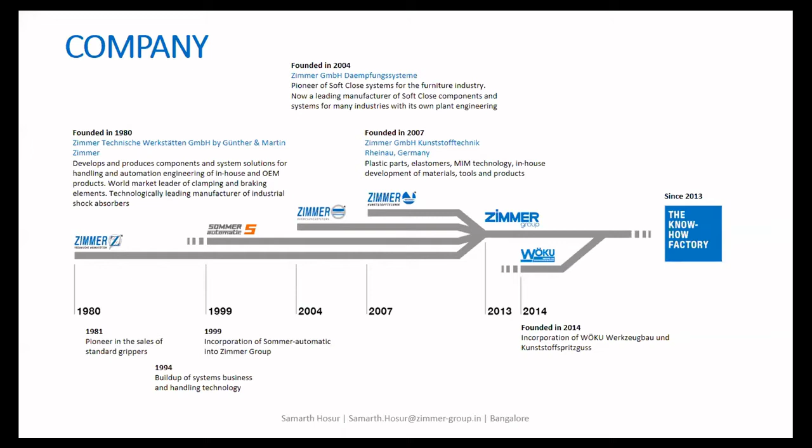Yeah, this particular chart tells us how the development of Zimmer Group has taken place from 1980 till now. You can see at the bottom, so in 1980 we developed the first standardized gripper, and in 1986 we developed tool changers. We have built shock absorbers for end cushioning. And today we have one of the most sophisticated end of the arm tooling that is portable, suitable to Industry 4.0 or the next generation factory, as we can call it.

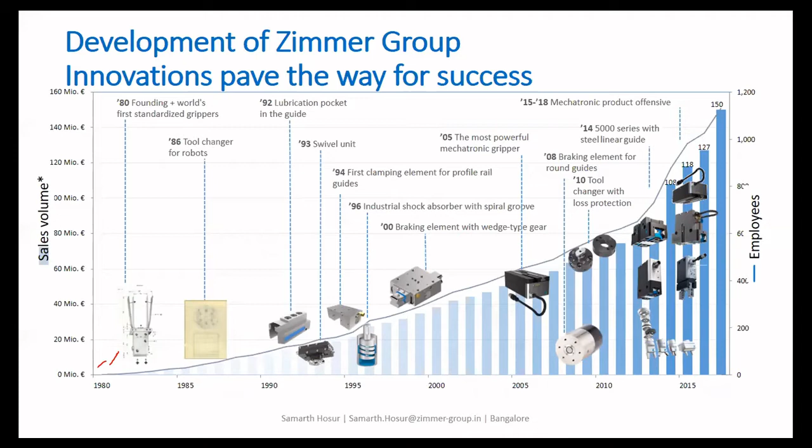So what I would like to tell you is, in this modern age of the digital factory, a lot of robotic systems are deployed in day-to-day production in a variety of industries, may it be automobile, pharmaceutical, or food and beverage industries. There are a lot of robots being deployed for the production of a variety of products. So now we can say robots have become a commodity, and the most important part of this robot would be the end of the arm tooling solution.

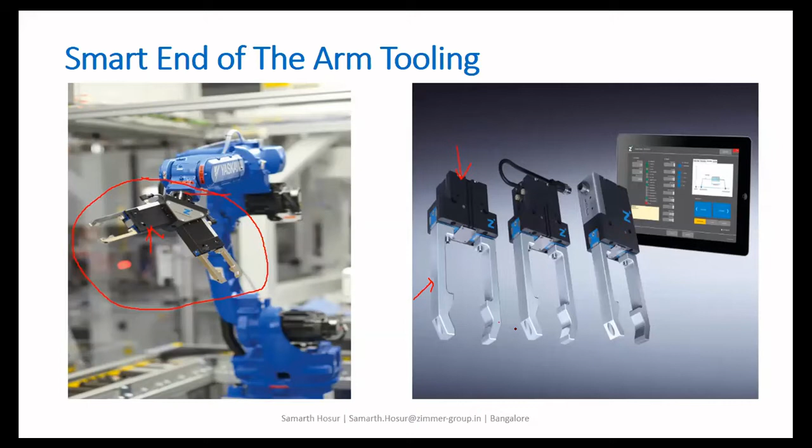Let's say we talk about a machine tending application wherein we are handling a cylinder block. These grippers will come in contact with the component, pick the component, and then place it inside the machine for operation. So these are generically called grippers, because they help in gripping the components. You can see there are 2 jaws. This is your gripper and these are the jaws of the gripper. This is just a schematic representation of how exactly the gripper looks. It looks similar to your hands. You can imagine your hands as 2 fingers of a gripper, and then analyze how we can use these grippers in industries for gripping applications.

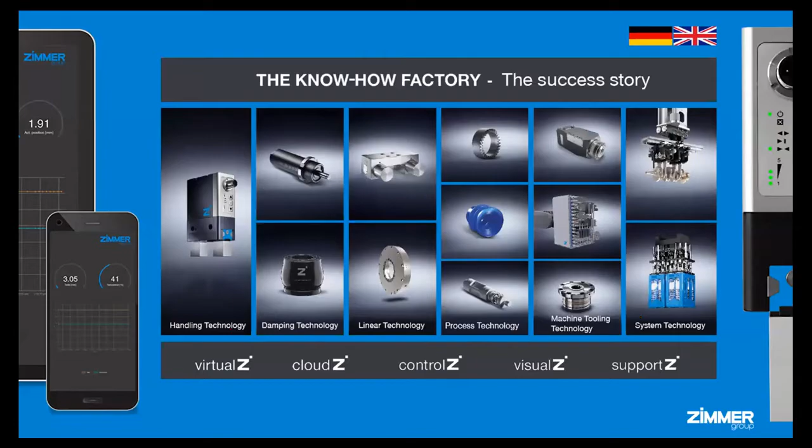Moving ahead, these are some of the technologies Zimmer Group operates in: handling technology, damping, linear systems, and all these technologies. We develop components for these 5 to 6 different technologies at the moment. So today, specifically, we are going to talk about handling technology. When we say handling technology, it will be the grippers. When we say grippers, it will be the end of the arm tooling. End of the arm tooling is nothing but the grippers fitted to the end of the robot arm. So we will talk in more detail about the types of grippers we have, how they can be used and for what kind of applications.

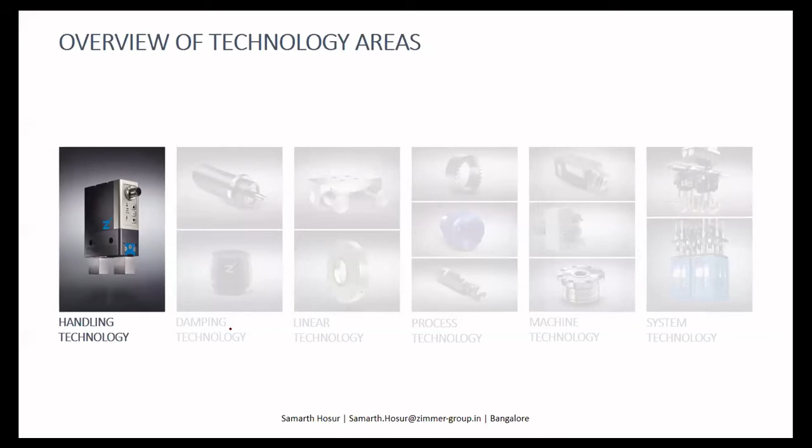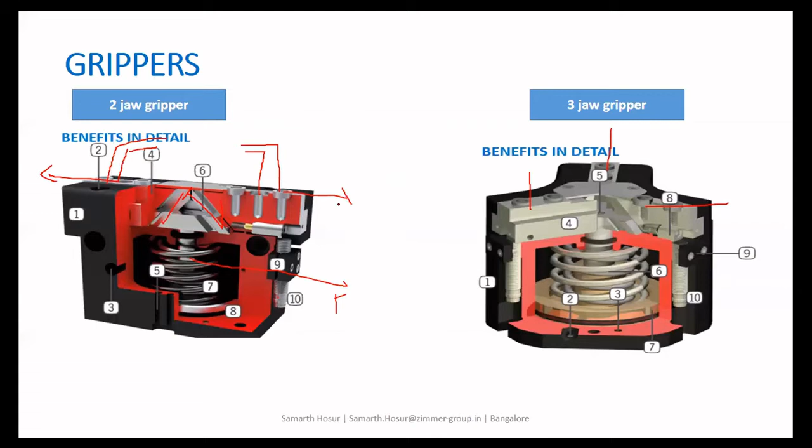Now let us talk about one particular series of gripper. We have this gripper series 5000. In this particular series, we have 3 different types of grippers. Again, one is 2-jaw parallel grippers. Why we call parallel? Because the gripper fingers will open in parallel fashion. 2 grippers will open in parallel fashion, one in this way and one more in this way. So we call it parallel moving jaws or parallel operating gripper.

Then we have 3-jaw grippers, wherein the opening of the gripper will be in concentric fashion. And we have 2-jaw angular grippers, where the opening of the jaws will be in an angular fashion. Angular in the sense the opening will be in terms of degrees. So what is the mode of operating these grippers? One is pneumatically operated, one more is hybrid operated, and one more is electrically operated.

When we say pneumatically operated, we have 6-bar pressure to operate these grippers. On supplying 6-bar pressure, this gripper will open and close and help in gripping the components. In hybrid, the actuation of the gripper is again with pneumatic air, but you will have an electrical feedback. That is the reason it is called hybrid, because actuation is pneumatic and you have an electrical feedback.

And one more is the completely electrical version, the most sophisticated grippers or the Industry 4.0 grippers. These grippers are operated by a BLDC motor as well as the servo motor. A 24-volt supply is required to actuate the electrical grippers. This actuation in terms of pneumatic, hybrid and electric remains the same for the 3-jaw gripper as well. The only difference is we have 3 jaws here instead of 2 jaws.

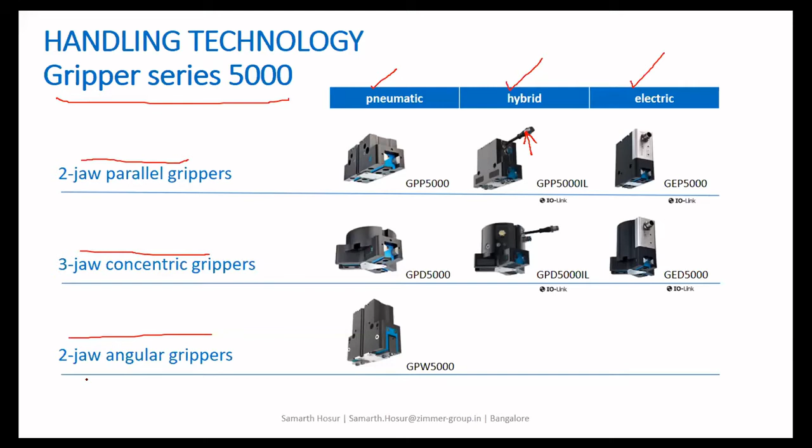So I hope the different types of gripper and the different actuation of the gripper is pretty much clear. We have 2-jaw gripper, 3-jaw gripper, as well as 2-jaw angular gripper. The actuation is 3 types: pneumatic, hybrid, and electric. Electric is again 24-volt supply. So I hope until now the gripper part is pretty much clear. We'll move ahead and study a little more in detail about this particular type of gripper.

Now we are exclusively talking about the gripper family 5000. This is one of the sophisticated or premium class of grippers, we can say. Why? Because it has a lot of advantages compared to anybody in the market. We have the corrosion protected gripper. The body of the gripper is stainless steel, steel on steel. This is the guidance. As you are all from the electrical as well as the mechanical departments, you understand much better about the friction.

So when you have a steel on steel, the friction is less. When the friction is less, the gripping force is more. So that is why in this particular wedge mechanism, where you can see this particular part is steel, wherein your fingers come and mount on this particular part, the friction between the gripper finger and the gripper is reduced to a larger extent. This is one of the key advantageous features of this particular gripper family.

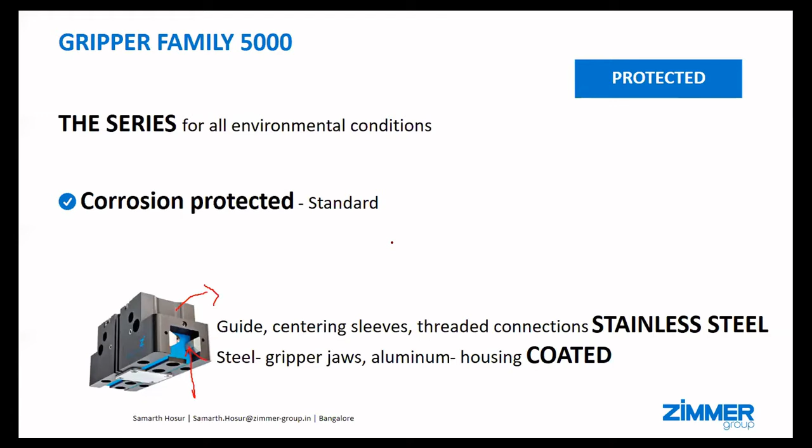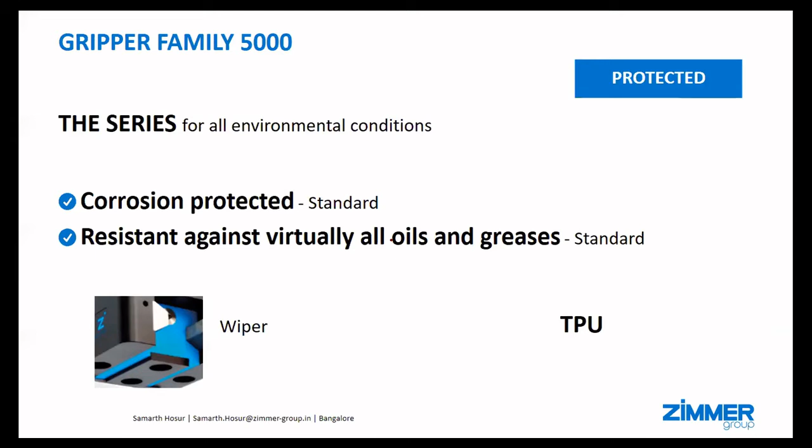Again, we have built this gripper to work in varied atmospheres. This particular gripper is resistant to various types of greases, various types of oils, or any kind of lubricant which is present in the industries. This is IP64, ingress protection class 64. 64 is specifically used for dust and dirty environments, or when you're operating the gripper inside water, or any liquid, grease or lubricant is there. This particular gripper is suitable to operate in such drastic conditions.

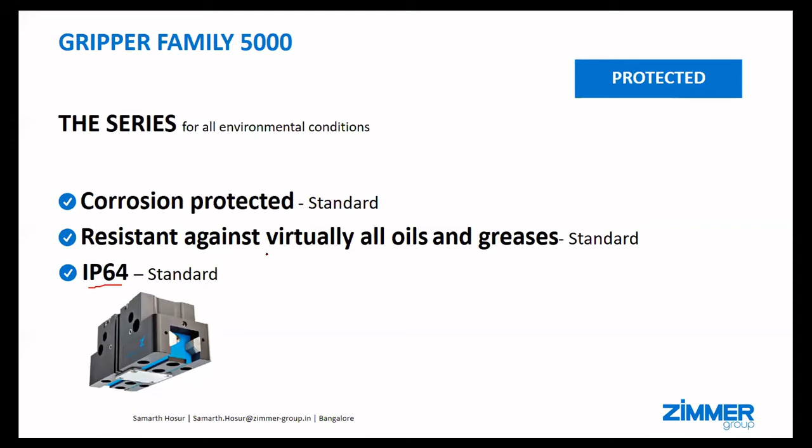See, one more advantageous feature of this is, as I said, the body of the gripper is completely steel and the guidance is steel on steel. The wear and tear is reduced to a larger extent. You can use this gripper up to 30 million cycles. When I say 30 million cycles, it is 30 million times opening and closing of the gripper. Opening and closing is considered as one cycle. So 30 million cycles this particular gripper can be used.

And this is the highest life cycle of the gripper which is available in the current industry, or in the current market, what I can say. Nobody has this particular life of the gripper. This is 3 times better than anybody in the market.

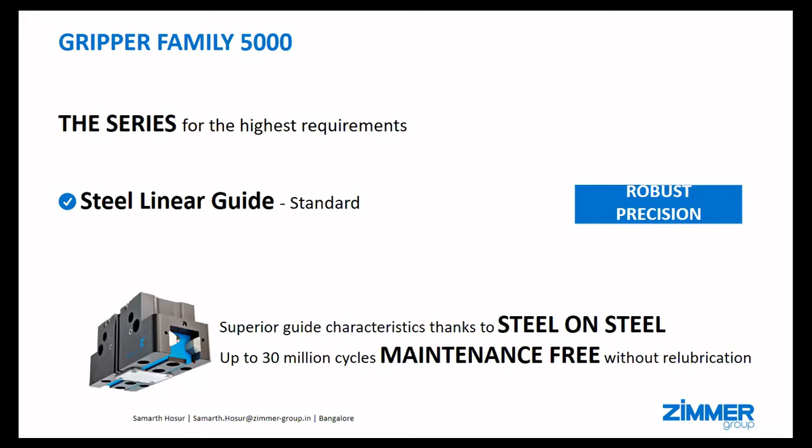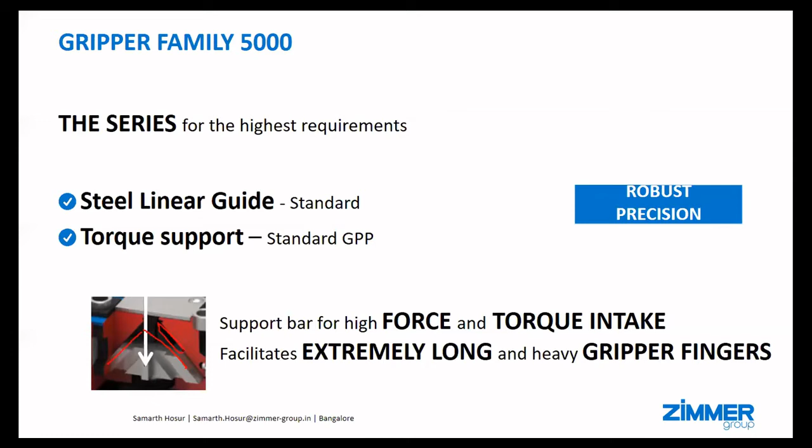Moving ahead, as I was talking, the important feature is this particular wedge mechanism. This is a wedge mechanism. As you can see, whenever you pass the pneumatic air, this moves up to push the piston. So the angle here is reduced to a larger extent. This particular angle is reduced so that the contact is increased. So the movement is very fast, and the finger can be used to a larger extent.

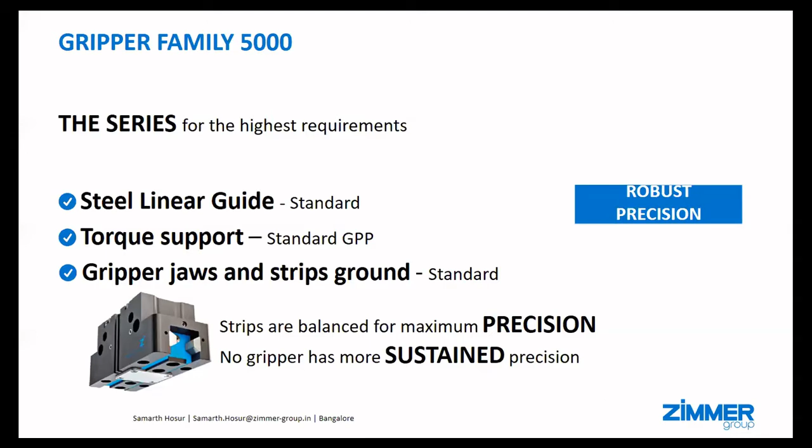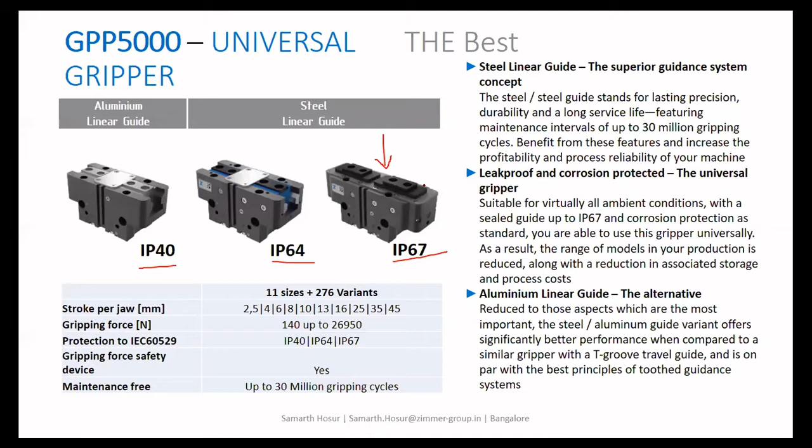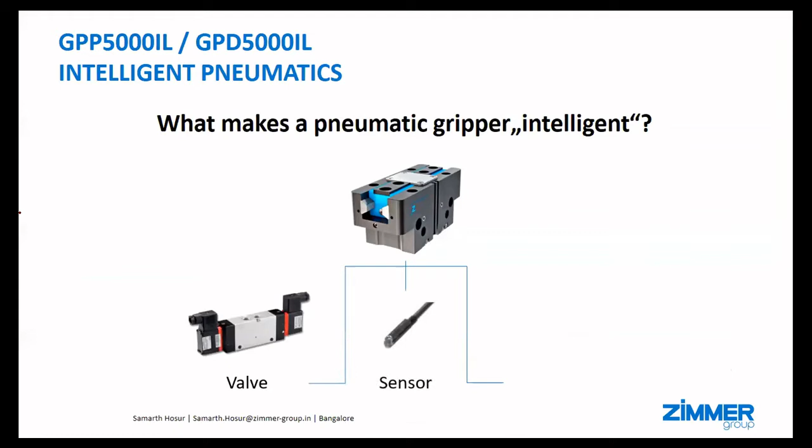Moving ahead, we have the intelligent grippers or the hybrid grippers in the 5000 family. Why do we call this particular pneumatic gripper an intelligent pneumatic gripper or hybrid gripper? Because for a pneumatic gripper, you would require a pneumatic valve or a flow control valve and a sensor to understand whether the gripper is open or closed. All these accessories you would require for a pneumatic gripper.

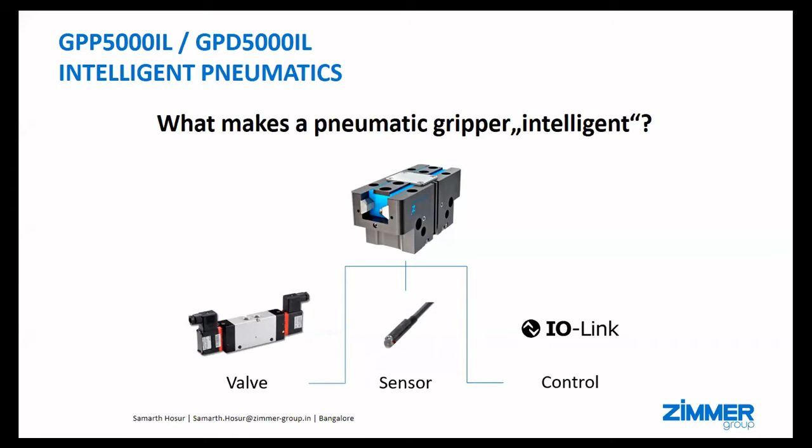Whereas for a pneumatically intelligent gripper or hybrid gripper, both will be inbuilt inside the gripper. The sensor will be inbuilt, as well as the flow control valve or pneumatic valve. Yeah, this is how the intelligent grippers or hybrid grippers look. This will help you reduce the cycle time, and it increases the production time by, let's say, 30%.

Again, it is a pneumatically driven gripper, but you have IO-link technology in it. IO-link technology will help you understand whether the gripper is closed or open, or in other words, it helps you sense whether the component is being gripped or not. This feature is inbuilt inside this gripper. And one more important feature is you can adjust the gripping force. A gripper should have a certain gripping force to hold a particular component.

Let us imagine you want to hold your phone with 2 fingers. You would require a certain force to hold your phone. Similarly, grippers also require a certain amount of gripping force based on the weight of the component. When holding your phone with 2 fingers you need one gripping force, and the weight of your phone varies. Now let's say you're holding a 10 kg stone with your 2 fingers. The amount of force you would require is a little higher. Similarly, we have varied ranges of grippers for different weights of component.

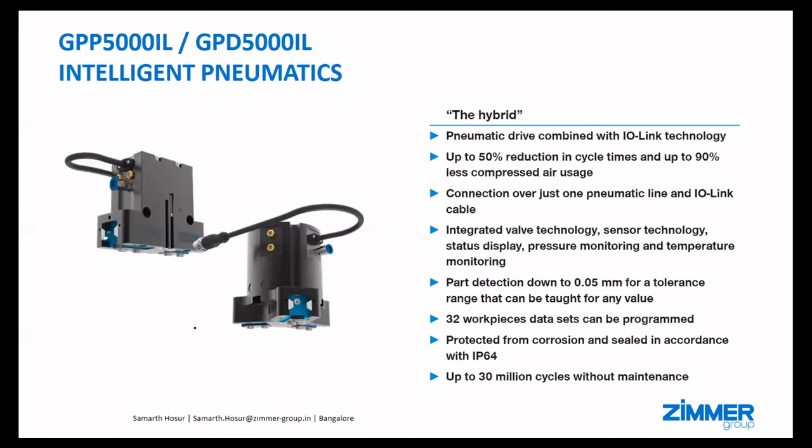This particular slide shows how the connection of the IO-link is available and how you will need to supply the pneumatic air. This is the port wherein you need to supply the pneumatic air, and this is the cable which is coming out, which can be taken as a feedback.

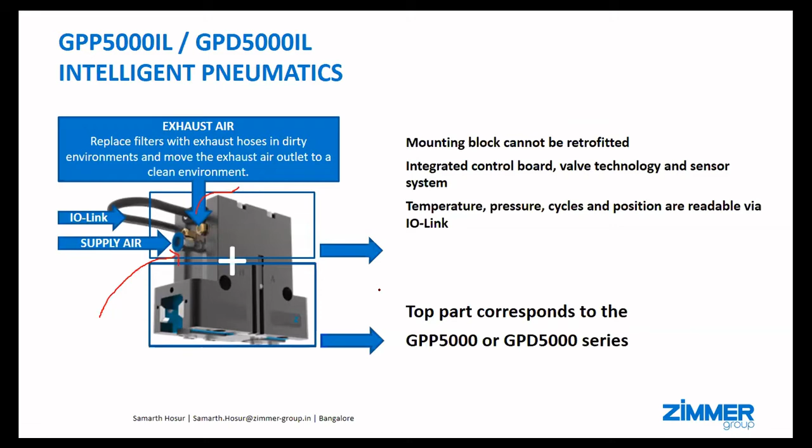This particular feature which I explained earlier remains the same here as well. This pneumatically intelligent gripper is also called a hybrid gripper. I request everyone not to get confused between the hybrid gripper and the intelligent pneumatic gripper - both are one and the same.

Gripping force safety - yes, there is a gripping force. Let's say suppose there is a sudden power cut, then the gripper should not drop the component, because it will damage the entire system. So there is a spring mechanism inside the gripper which will hold the force and help you in retaining the component.

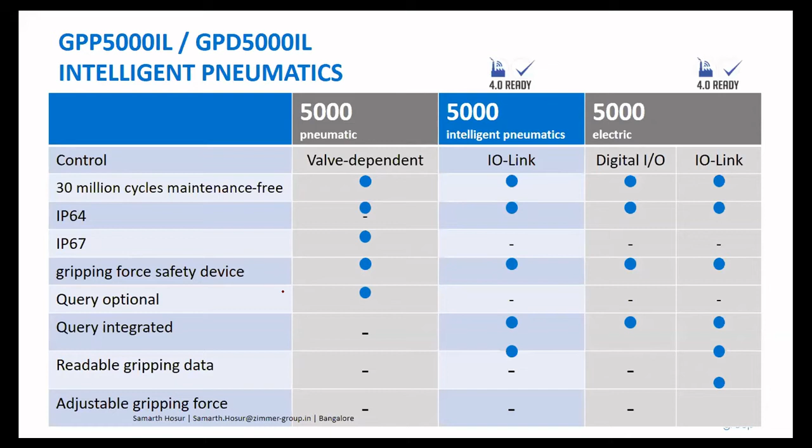So that is the movement of your fingers or the jaws - 10 mm per finger is the movement of your jaws.

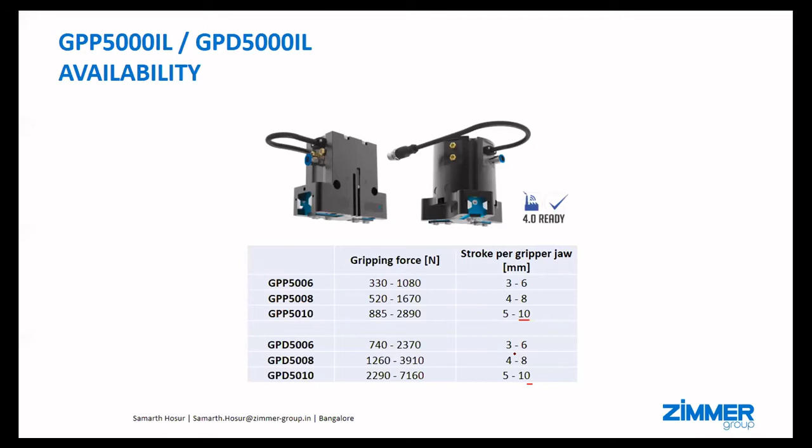Again, the IO-Link masters can be from Beckhoff, can be from Siemens, can be from Mitsubishi - any make of IO-Link master you can use, and it is compatible with all the makes of the IO-Link masters.

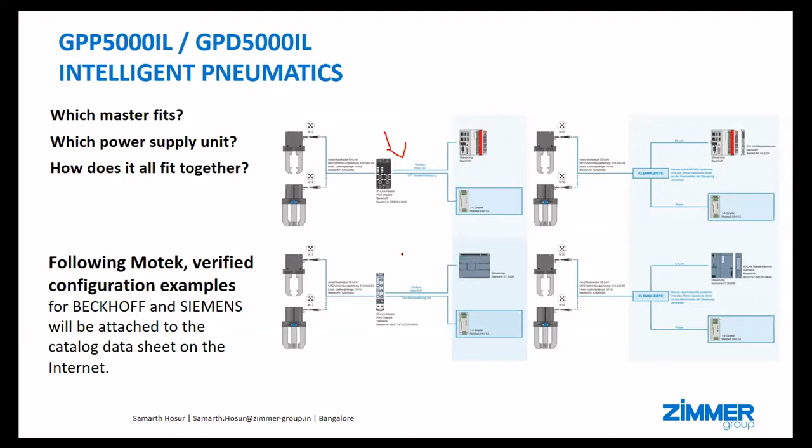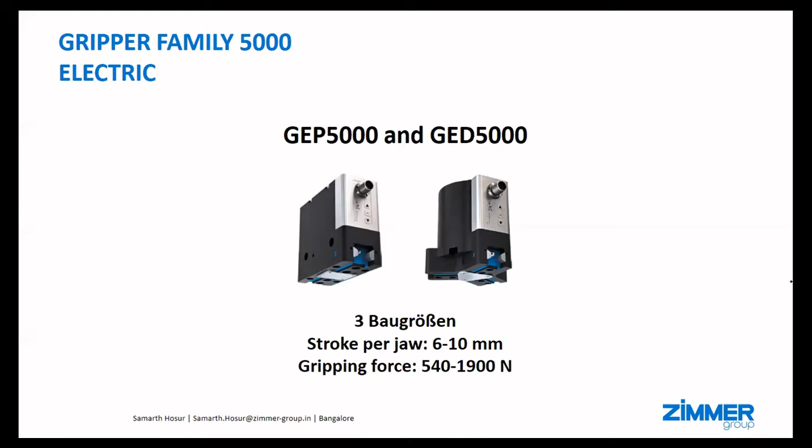Now moving ahead, we talk about the exclusive electrical grippers. The supply required to actuate this particular gripper is 24 volts electrical supply. And why we call this particular gripper the sophisticated gripper or the industry 4.0 gripper? You can see here the advantage of electrical gripper over a pneumatic gripper.

For a pneumatic gripper, what are the things you would require? One is a gripper, and you would require a sensor, you would require the pneumatic valve, you would require a pneumatic service unit, and you would require a signal splitter to connect it to your controller. These are the things which you would require with respect to a pneumatic gripper.

Whereas in electrical gripper, it is directly connected to your controller. All these features - the sensor, the pneumatic valves - are inbuilt inside this particular gripper. And the connection of the electrical gripper to your PLC is through a single cable, and this cable is used for data transmission as well as for the transmission of the signal. Both ways, the single cable is used to transmit the signals.

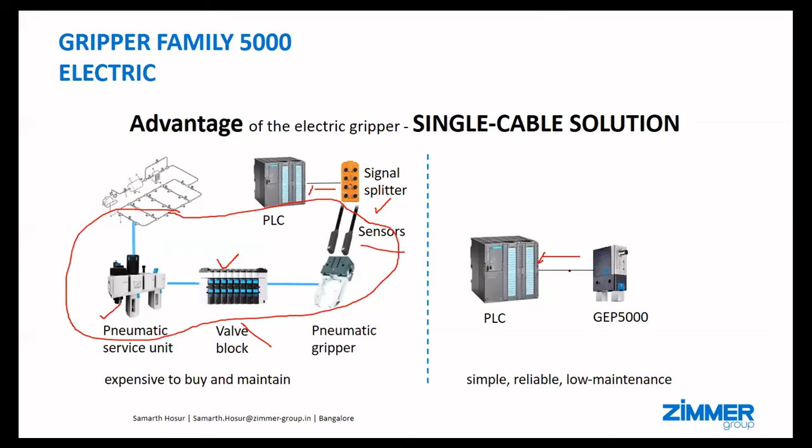You might have the question why we need to connect the gripper to the controller. The controller is the thing which controls the operation of the entire system, not only the gripper - the entire system, the robot, the entire cell is being controlled by the controller. So each and every component is connected to the controller. Similarly, the gripper is also connected to the logical controller.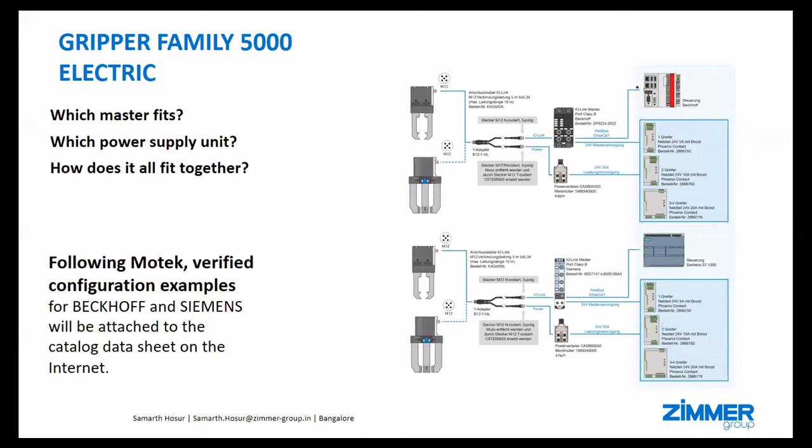So now I'll just summarize about the gripper family 5000. We have studied about the pneumatic grippers, wherein the actuation is with the help of 6-bar pressure. Hybrid grippers, or the pneumatically intelligent grippers, wherein the actuation is with the help of pneumatic air and you will have electrical feedback. And the electrical grippers, the complete electrical grippers, the industry 4.0 grippers, wherein the actuation of the gripper is with the help of 24 volts, and you will have inbuilt sensors and all the components built into one particular gripper.

So moving ahead with the angular grippers, what are the advantages and features of angular grippers over the parallel grippers? The reason I'm making this comparison is it will make the understanding of the parallel gripper as well as the angular gripper pretty much clear. So I'll demonstrate the angular grippers in comparison with the parallel grippers.

In parallel grippers, the opening of the gripper is in a parallel fashion. Now in an angular gripper, as I said, the opening of the gripper is in an angular fashion: 0 degree, 15 degree, 90 degree. That will be the opening fashion of these angular grippers. This angular gripper has 30 million maintenance-free cycles, and you would not require any maintenance until 30 million cycles. It's very robust, built for very harsh and dirty environments. All these features are also involved in this particular series.

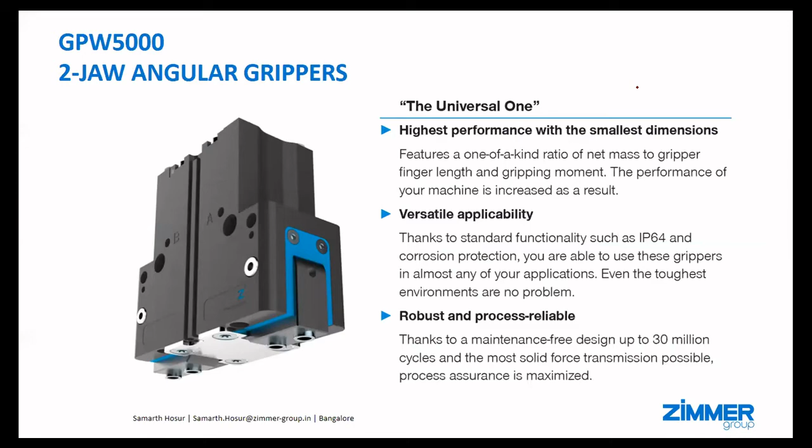Yeah, see, you have seen the parallel gripper. These are the jaws which are opening up in an angular fashion. You can see the wedge is made in an angular fashion. This makes the opening of the gripper in an angular fashion.

On supplying air, this particular cylinder will push this piston, and then the piston further moves this wedge and the gripper opens in an angular fashion. So just have a look at this particular point—this is a positively driven lever mechanism, which will help you in opening of the jaws. These are the gripper jaws where you can mount your gripper fingers. And this is the double acting pneumatic cylinder we have, which will help you in moving the piston up and down so that the gripper opens and closes.

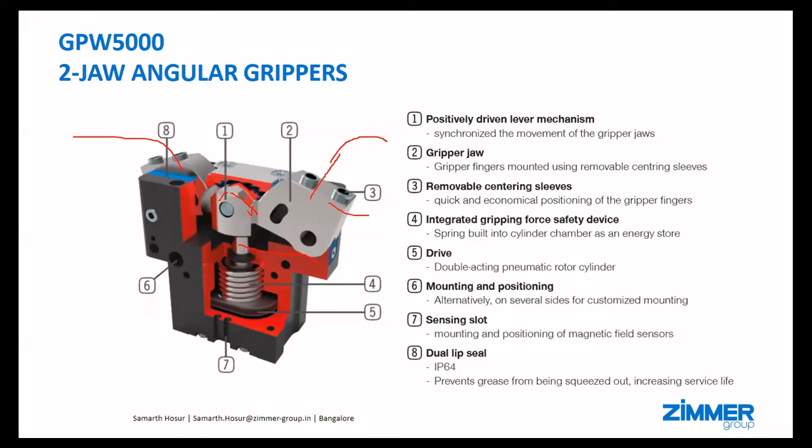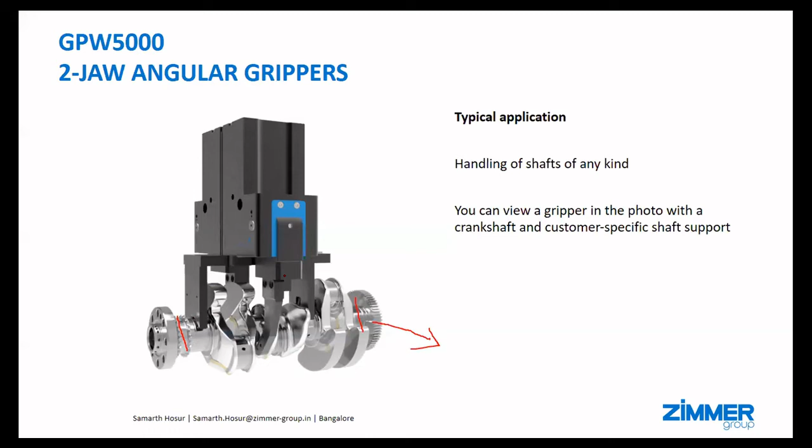The advantage of this particular gripper when handling the crankshaft is this—we call it a journal. This is your journal. The dia of the journal usually varies; we have a lot of variants in the industry. This particular journal dia varies from a large variant—let's say from 30 mm to 250 mm. So there's a larger difference in this dia. To handle such large variants, you can use this angular gripper, because it can accommodate many variants in its opening and closing.

I'll tell you a little more in detail about this. So now, as I said, we'll have a comparison with the parallel gripper. Let's say this is one gripper—this is a parallel gripper, and this is your angular gripper. Now I'm handling this particular component. My stroke per jaw is 13 mm—this jaw moves 13 mm in this direction and 13 mm in this direction.

This is the parallel gripper. How about the angular gripper? The opening will be in an angular fashion, right—15 degrees. The opening of this jaw is 15 degrees on this side and 15 degrees on this side. So 15 degrees, when I convert into mm, is 71 mm. So you can accommodate a larger variant, as I said.

Now this is one variant you're handling—let's say this is 20 mm, the dia of this is 20 mm. And if I want to handle a dia of 30 mm, it would be difficult for me, because my total opening of the gripper is 26 mm—that is 13 mm this side and 13 mm this side. So the total opening is 26, and I cannot accommodate a component with a dia of 30 mm. In that case, that particular variant can be handled easily with the help of this angular gripper. This is the advantageous feature of this angular gripper—it can accommodate many variants or different sizes.

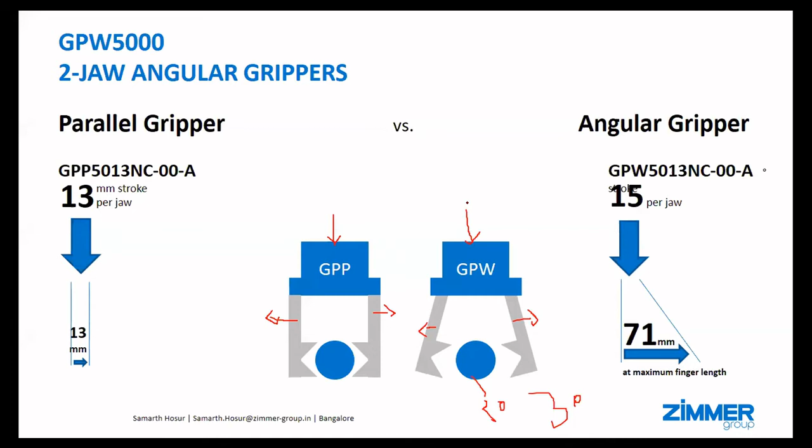Stroke comparison: for this particular series of gripper, we have 8 mm stroke per finger, whereas this has 45 mm per finger. So the stroke increases by 5.5 times when you compare parallel gripper and angular gripper, and the cost is also 5 times lesser than the parallel gripper. The cost of this angular gripper, commercially, will be on the lesser side compared to the parallel side. This would be more cheaper than the electrical gripper, I would rather want to say. So these are some of the advantage features of angular gripper over parallel grippers.

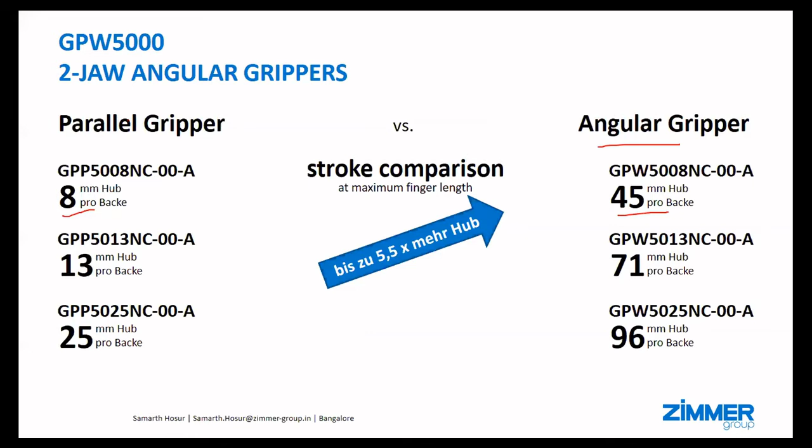Now we will study a little more in detail about the electrical grippers, which is the Industry 4.0 gripper. You can see the series GEH6000IL. This is the best in class gripper we have, one of the topmost grippers we have. Why do we call it topmost? Let us see. Because you can have control over the gripping force as well as control over the stroke.

Now I'll give you an example. Imagine you have five different components: a steel rod, a glass jar, a wooden box, a coin, and a metal plate. I just want you to imagine all these five components - a steel rod, a glass jar, a metal plate, a coin, and a wooden box.

So for five different types of components, you would require five different gripping forces. You cannot have the same gripping force for handling a steel rod as for the glass jar, because the glass will break if we apply more force. This particular gripper is sophisticated because it will help you control the gripping force, so you can adjust it according to the component. If a wooden box comes, you set a different gripping force. If glass comes on the line, you set a different gripping force. If a steel rod comes, you set a different gripping force. So you can have complete control of adjusting the gripping force.

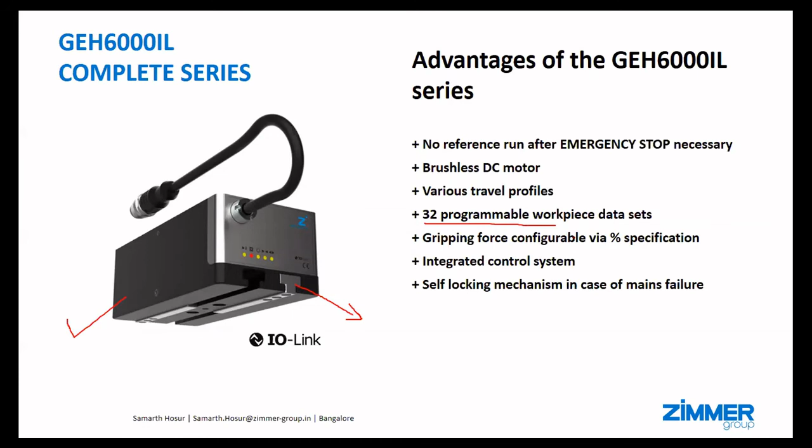As well as, since all these different components have different dimensions, the stroke also should vary, or you should have an adjustable stroke. The position or stroke adjustment is also available - you can adjust the stroke as and when you require based on the components you're handling. It can handle up to 32 different components of different size and weight. All 32 different components can be completely different, whether in physical appearance or weight - anything it might be. 32 different components can be handled with one particular gripper. You can monitor as well as control - both monitoring and control are possible with this particular series of gripper.

And these are some of the available ranges of grippers we have. GEH6000: the maximum stroke available is up to 80 mm per finger, so total opening will be 160 mm. Minimum starting from 40 mm and up to 80 mm stroke is available. Whenever I talk about stroke, it is stroke per finger, not the entire stroke - so when I say 40, the total opening will be 80 mm.

Yeah, the connection again remains the same. The gripper is connected to the IO-Link master, and from the IO-Link master, it is connected to the PLC. IO-Link master just acts as the interface between the gripper and the controller. Some people might ask why I would require an IO-Link master in between. Instead, I could directly connect it to the PLC.

The communication, what this gripper says, will not be understood by the controller. This communication is converted to a language understandable for the PLC. This IO-Link master converts the language to one suitable for the PLC. So that conversion is done in this IO-Link master. The language of the gripper and the PLC controller is not matchable sometimes, and in that case you would require this IO-Link master as a mediator to communicate between the gripper and the controller.

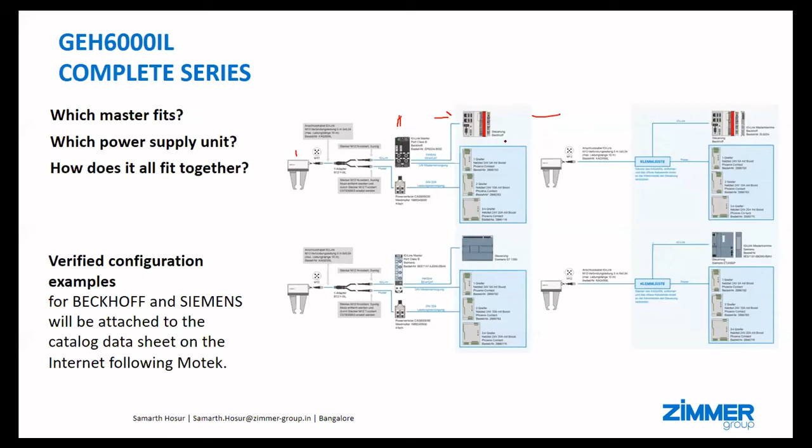All right. Now we have one more series of electrical gripper, that is GEP 2000. What does this gripper offer? This gripper is very compact. When you have very little installation space, or when you are handling very small or minute components, for example in pharmaceutical, food and beverage, or FMCG industries, where the components are very lightweight and the installation space is constrained, you can use this smart compact electrical gripper.

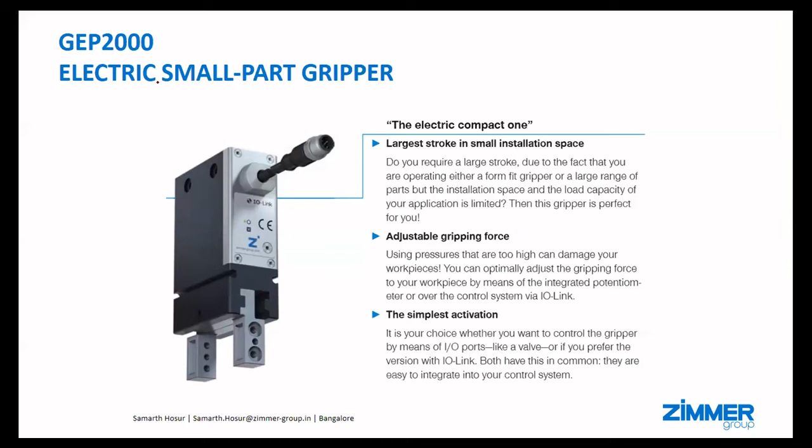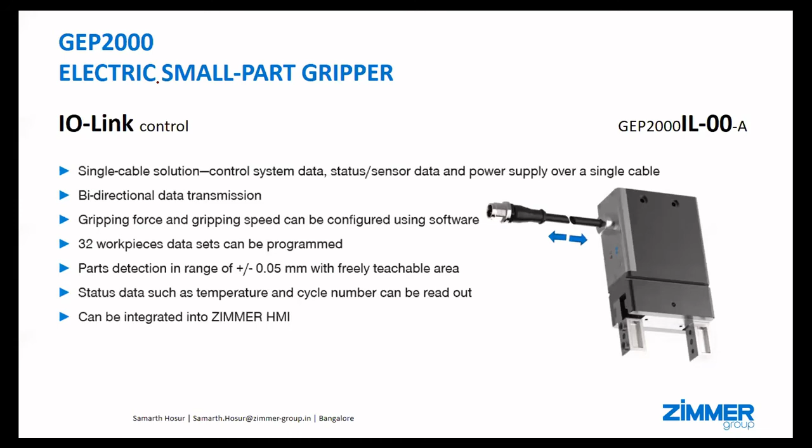Again, we have two versions in this: an IO-Link version and a digital IO version. First, let us study the IO-Link version. The connection again remains the same. This picture will give you a clear idea of the connection. There is only one cable coming out of the gripper. This cable is connected to your IO-Link master, and from the IO-Link master, with Profinet or any kind of field bus, you connect it to your PLC. This is how the connection of the electrical gripper IO-Link version is done.

Again, as I said, in the electrical gripper we have two versions. This is version number 1, the IO-Link version, and the other version is digital IO. The only difference between these two versions is that in the IO-Link version you have control over the gripping force. You can adjust the gripping force with the help of the PLC. You can set the value of the gripping force in the PLC.

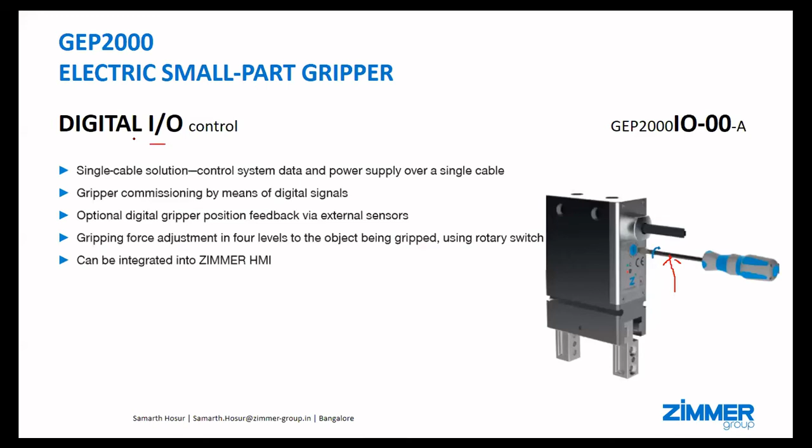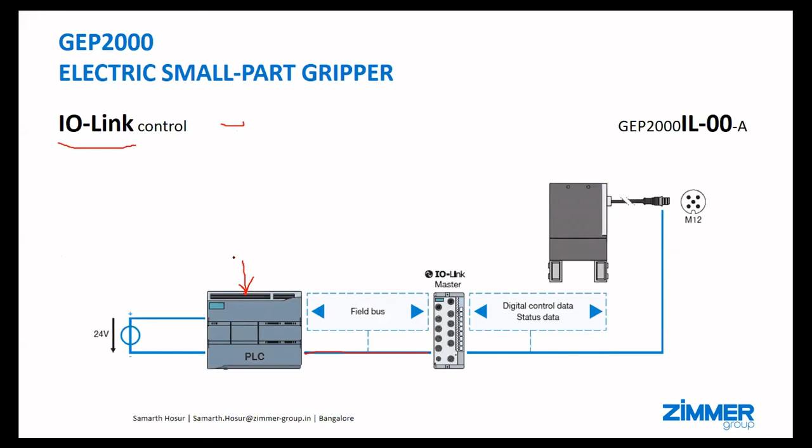Whereas in the digital IO model, the gripping force is adjusted mechanically with the help of an Allen key. So 4 different levels of gripping force adjustment can be done mechanically with this Allen key in the case of digital IO. The actuation of the gripper remains the same; the gripper is actuated by 24 volts only. Here the gripping force is adjusted mechanically, and there it is done through the logic controller or the PLC. That is the basic difference between IO-Link and digital IO.

Yeah, you can see here the gripper is connected directly to the PLC, and you won't require any IO-Link master in between. Why? Because here you are only monitoring the data from the gripper. You are not adjusting or controlling anything through the controller. There is no control here; only monitoring is done with the PLC. That is the reason there is no IO-Link master in between. It is directly connected to the gripper.

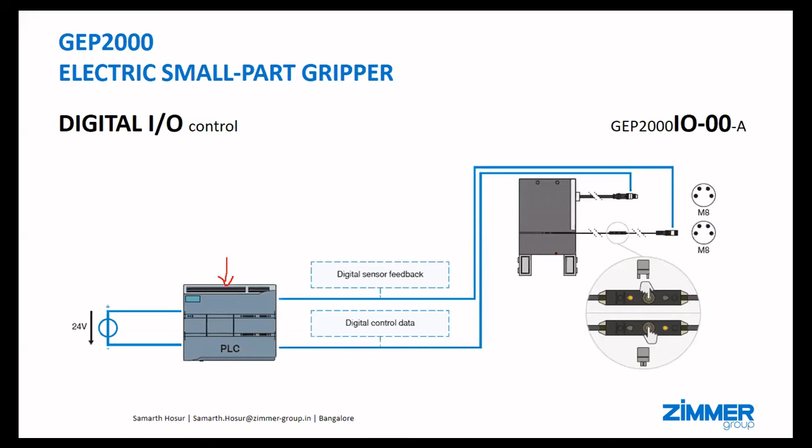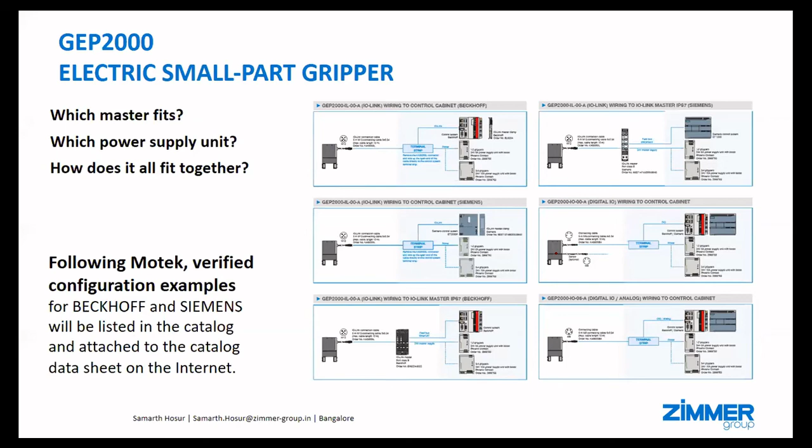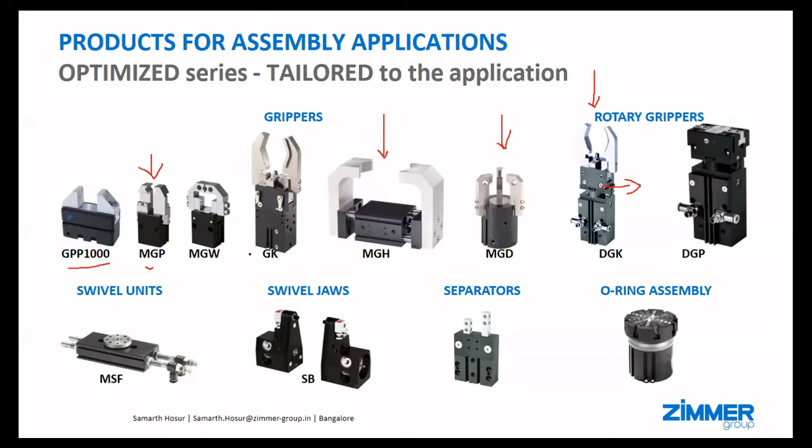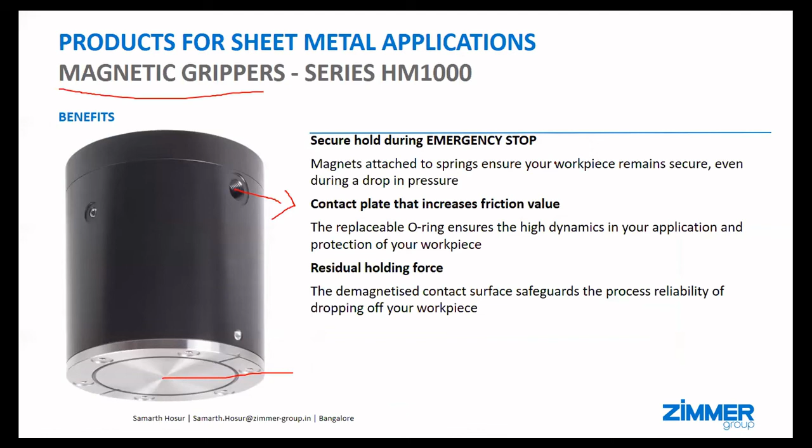So let's say you have a flat sheet and it would be difficult to handle with normal grippers. You can use these magnetic grippers to handle such kinds of components.

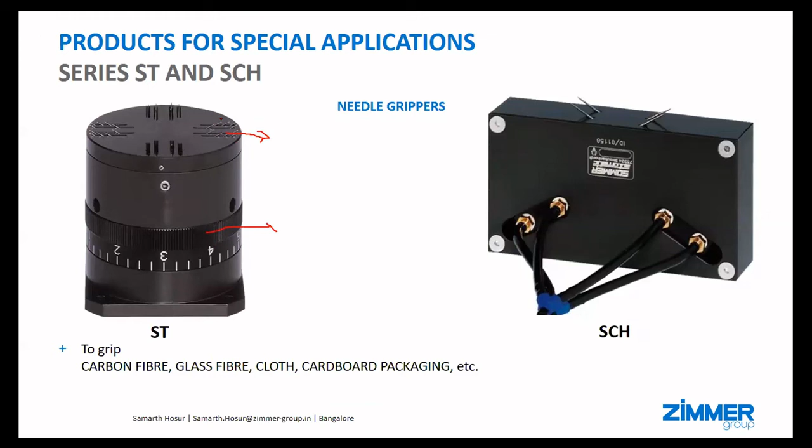What it does is, you can see the needles coming out here. On supplying the pneumatic air, the needles come out and pierce into the cloth or fiber, and then it picks the component. And the length of the needles can be adjusted. You can see the numbers 1, 2, 3, 4 over here. This is the rotating bar which can rotate and adjust the length of these fingers, which will pierce the fabric, and then it can grip the component.

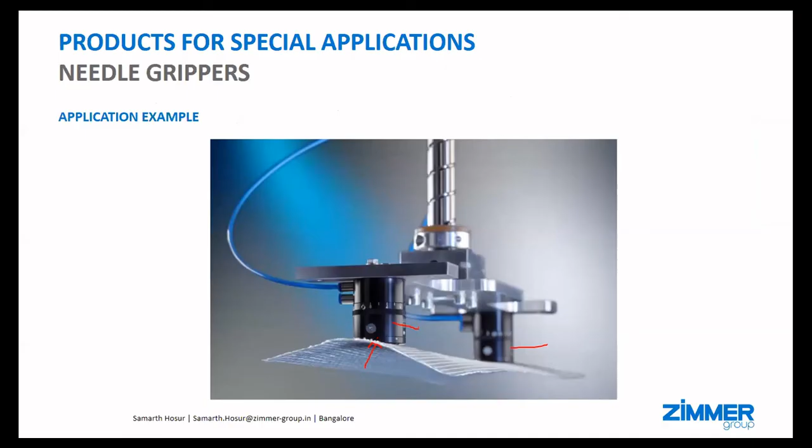Now, this is the human collaborative gripper. Nowadays, you must be more familiar with cobots, because the days are coming when robots and humans start working together. Humans and robots will work together in the coming future. The next generation factories will have these cobots. Collaborative robots are called cobots.

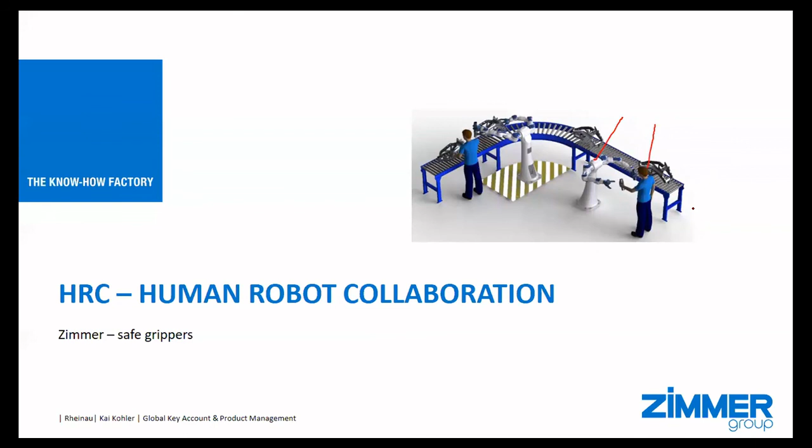So the cobot cannot be called collaborative unless the end of arm tooling is collaborative. You can see here the robot and the humans are working together. So it should not harm the human when you are working along with the robots. So we have these collaborative grippers which will help you in working along with the cobots.

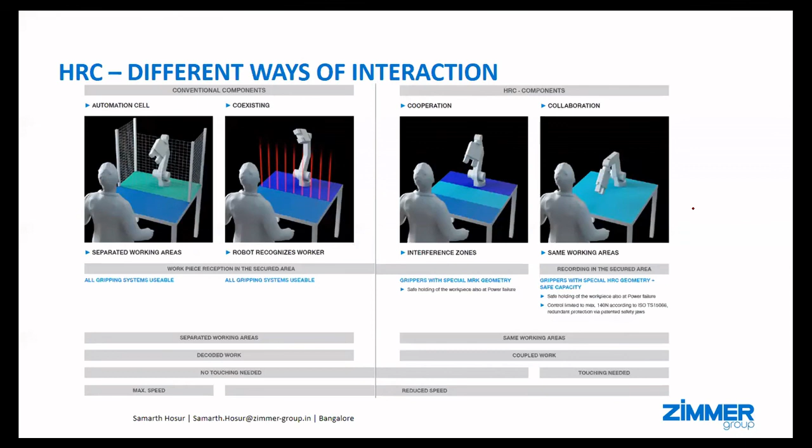For example, let us imagine that the gripper is approaching the component. It is about to grip the component. Now if you insert your hand in between, the gripper will stop. It has an inbuilt torque and force sensor and a camera which help in understanding whether there is human intervention or not. It will not harm the humans when they are working along with the cobots.

This is compatible with all kinds of cobots. Yaskawa, you can consider any cobot. This can be directly mounted and is compatible with all the cobots.

And we have been awarded one of the most prestigious German awards for this particular design of this gripper. The Red Dot German award has been awarded consecutively 3 times to Zimmer for the design and development of this particular collaborative gripper.

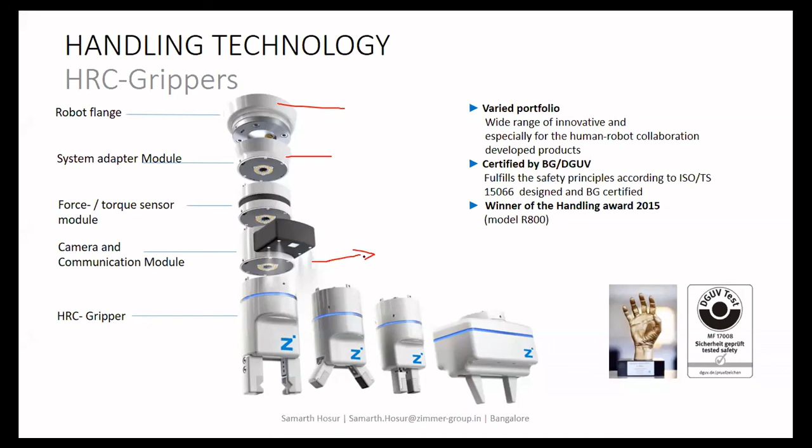See, we have features on this particular gripper. There is an LED light display on the gripper body, which specifically gives you information. Let's say there is a blue light glowing on the gripper, it says that the gripper is in standby. A person a little away from the gripper can also see whether the gripper is operating fine or not.

If it shows a yellow light, then gripping is in process. It says that the gripper is about to go and grip the component. If the LED light shows green, then the component is being gripped. If it indicates red light, then there is some sort of error in gripping. So these are the indicators available on the body of the gripper, which make it more special and more attractive in terms of Industry 4.0.

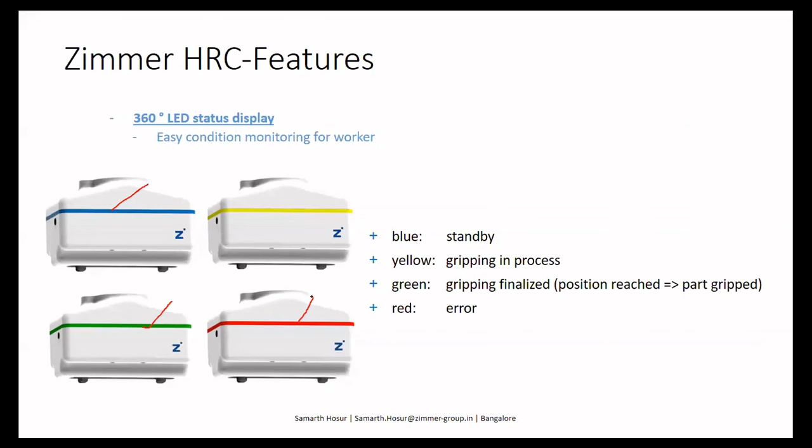And last but not least, we also cater to the complete system technology. When I say system technology, we take care of the complete end of arm tooling, from the robot to whatever comes below the robot. The entire system is taken care of by Zimmer. We have developed more than 7,000 systems till now. Most of them we have supplied to the automobile industries.

The advantage of building the system is we take the responsibility, we take care of the maintenance of each and every component, and we assure that the design and documentation is taken care of by Zimmer Group, and for the complete system we give 10 million cycles maintenance free. For each and every component, the life is around 10 million cycles.

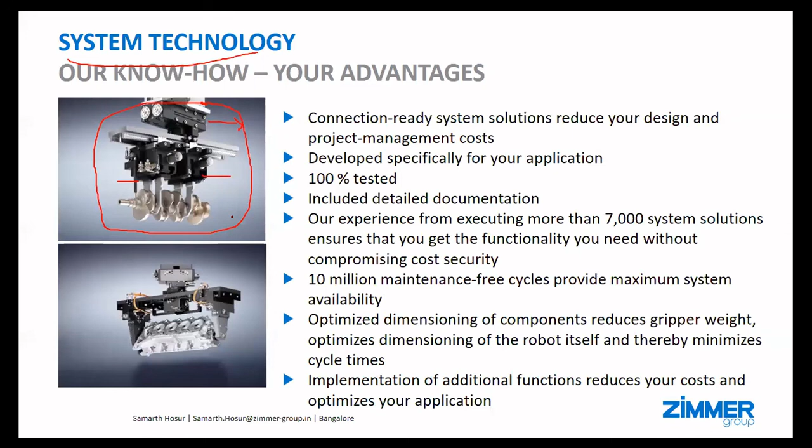So we take complete responsibility for the EOAT or for building the complete system, and we have good expertise in building these systems. We have built more than 7,000 systems till now, and it's good to build a system, because it will be more reliable from the robotic cell perspective.

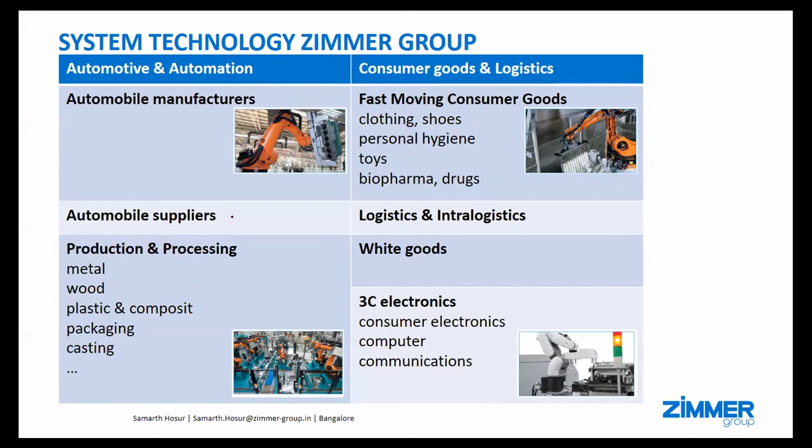And these are some of the industries we are working with. We are working with automobile industries, FMCG industries, food processing industries, machine tending industries, or electronic chip handling applications or PCB handling applications. So these are some of the applications we are working in, or some of the industries we have already worked with.